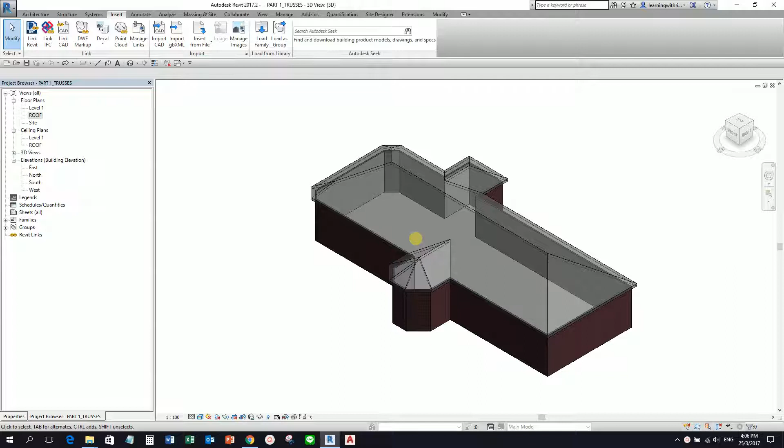So what I'm going to do is change my view first to roof. Then from the structure tab, from the structure panel, you can see the tool there, truss. So I'm going to select the truss here.

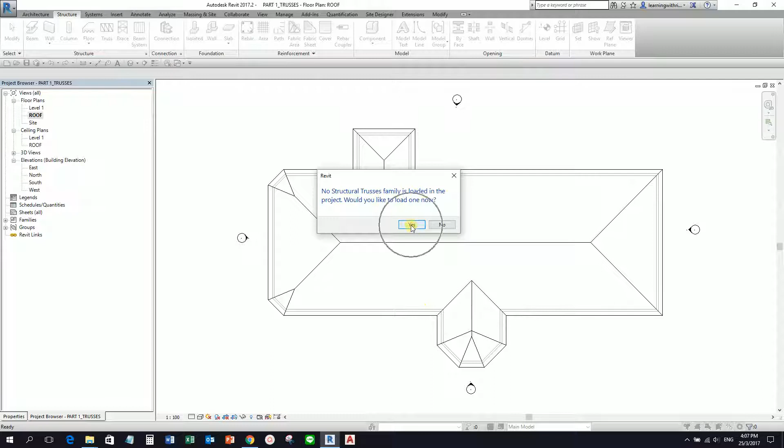You will notice in this data set, in this exercise file from lynda.com, the trusses are not yet loaded, so we're going to load one now. I'm going to select yes here, then go look for structural trusses, and select here Howe flat truss. I'll just select this one, then select open. There you go, so it's now loaded.

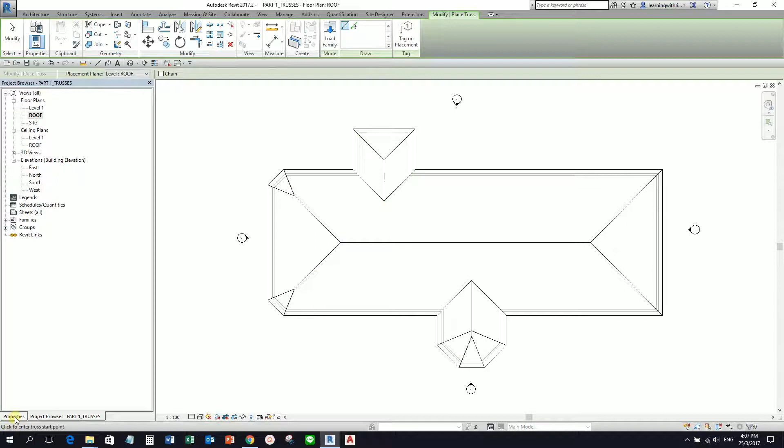So before I place this one, I'm going to change the bearing vertical justification. Instead of center, I'm going to change this to bottom.

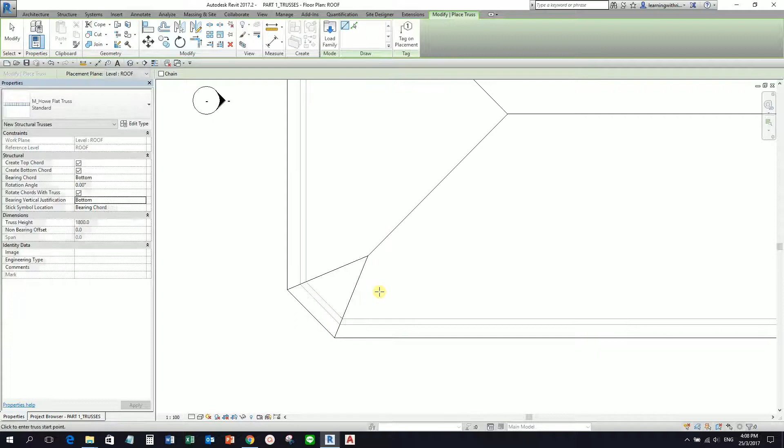So let's now go ahead and start to create our truss. I'm going to place one here, one, then I'm going to place one here, two. Let me just change my visual style to wireframe so we can see the truss. Alright, so this is our first truss.

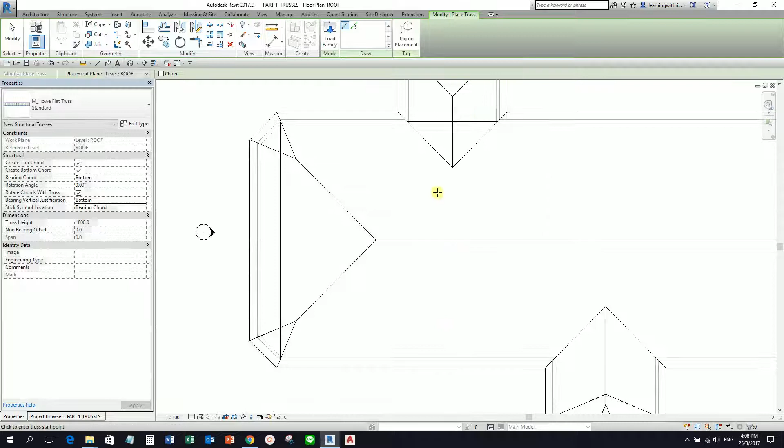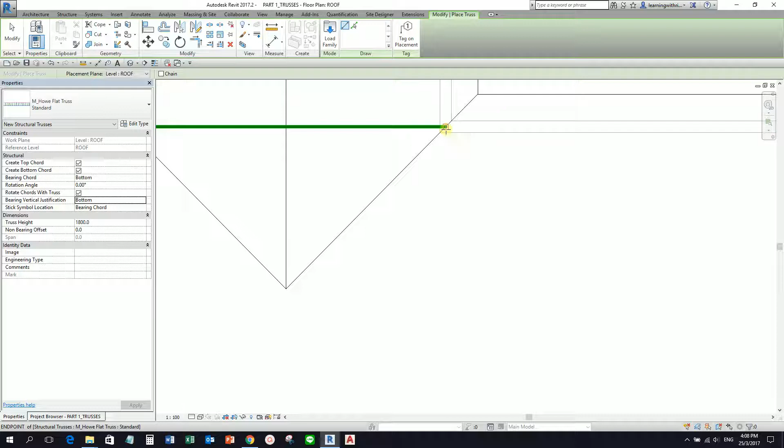So let's say I'm going to create one here also. I click here, one, then I click here, two. And then I'm going to create another one here. One, then I'm going to click here. So I'm going to place another one here. I'm going to place another one here.

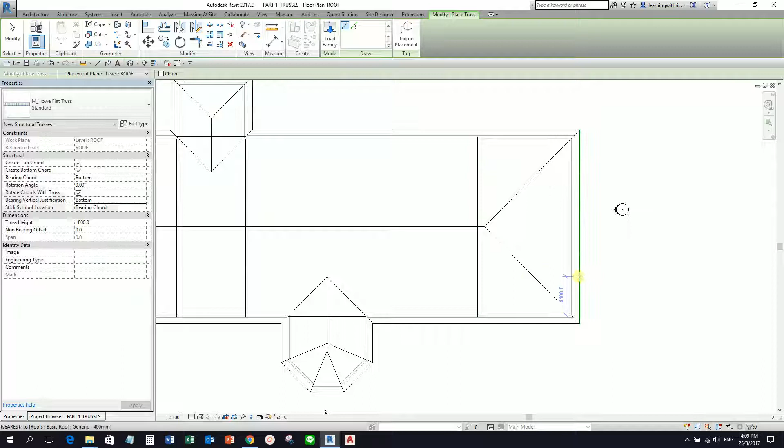The exact location is not critical in this exercise. Later on, we're going to modify the dimension. Then I'm going to place another one here also, and create another one here. 2000. Okay, here also 2000.

So what I'm going to do next is copy this, 3 more copies. So I'm going to select copy, make sure the multiple and constraint is checked. So I'm going to pick the base point, 3 more copies, 1, 2, 3.

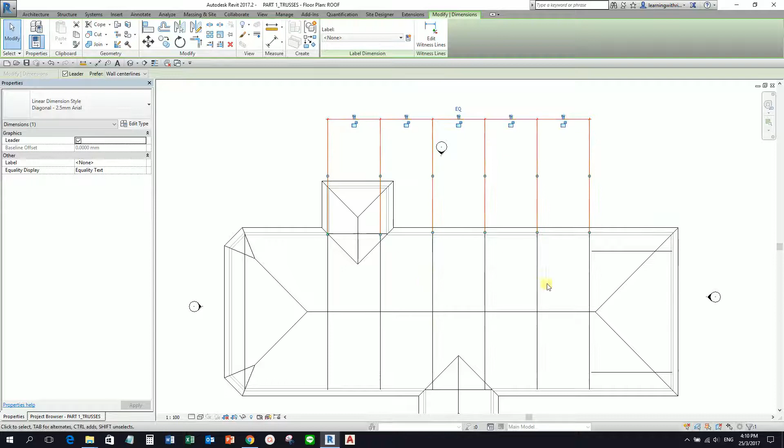Now, to make these trusses equal distance to each other, from my quick access toolbar, I'm going to select aligned dimension, then click this one, 1 through 6, then click outside, and select EQ. So it will make these trusses equal to each other. Then I select modify. But I do not need this dimension, so I'm just going to delete this. I just use this to equalize the distances, but I don't need this one, so I'm going to delete it and just select unconstrained.

So same with this truss here. I'm going to select this and then copy 2 more, 1, 2, and then modify.

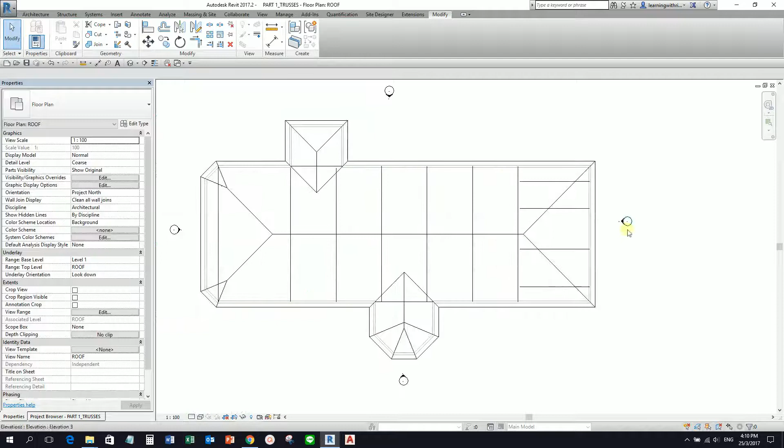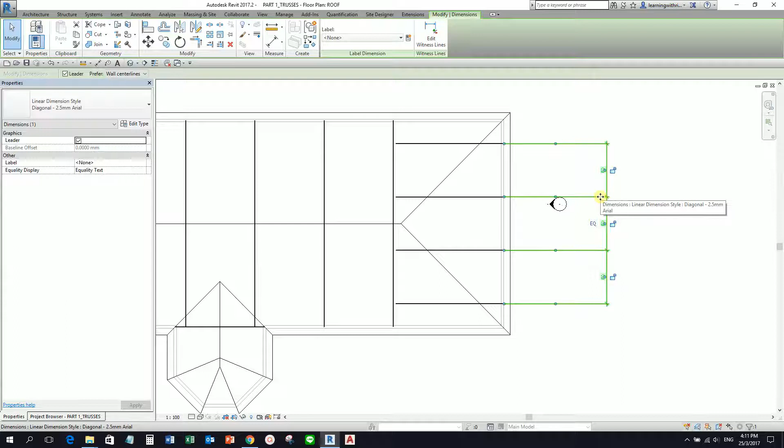Again, we're going to make their distances to each other equal. I'm going to select aligned dimension, pick here, and select EQ. There you go, so it's now equal. So what I'm going to do next is select this dimension and delete it, again just unconstrained.

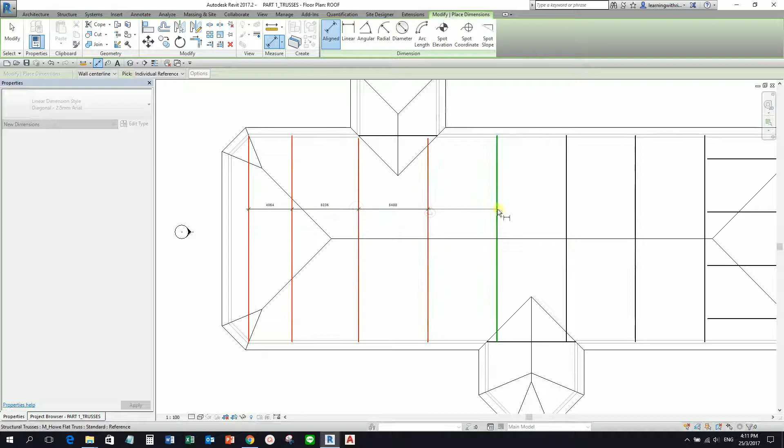Okay, so probably I'm just going to add another truss here. I select this, right click, create similar from here to here. Probably I'll just make them equal distance to each other. Pick EQ, and join. I think it's not a good idea, so I'll just undo.

Alright, so no need for me to make it equal. Anyway, I can just select that and then use the arrow on my keyboard to move it.

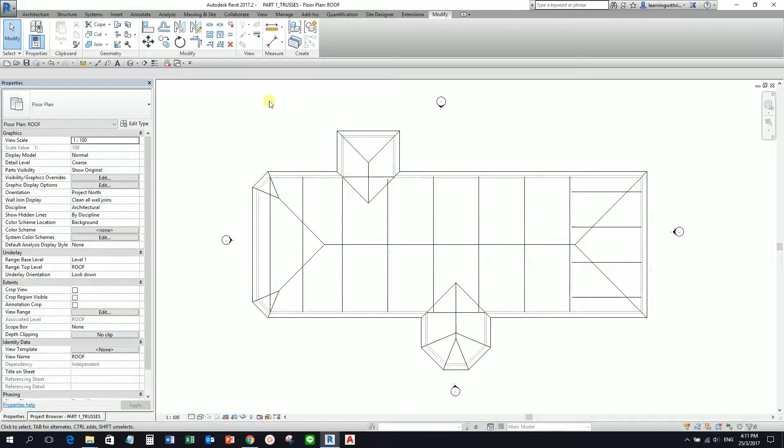The next thing that I'm going to do, if you change your view to 3D, you will notice it's like this, right? Our trusses are sticking out from the roof. So that is the next thing we are going to modify. We are going to attach our trusses to the roof.

Okay, if you still remember when you create your wall, there is this tool called attach top base. You see how if I select the wall, there's an option here, attach top base. Actually, in your trusses, you also have that tool.

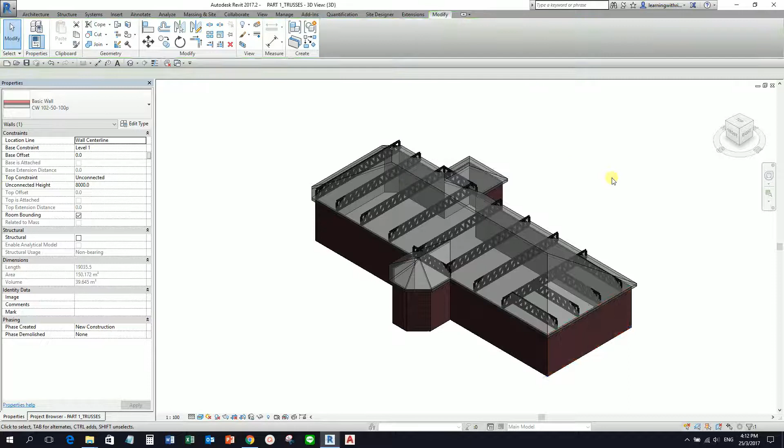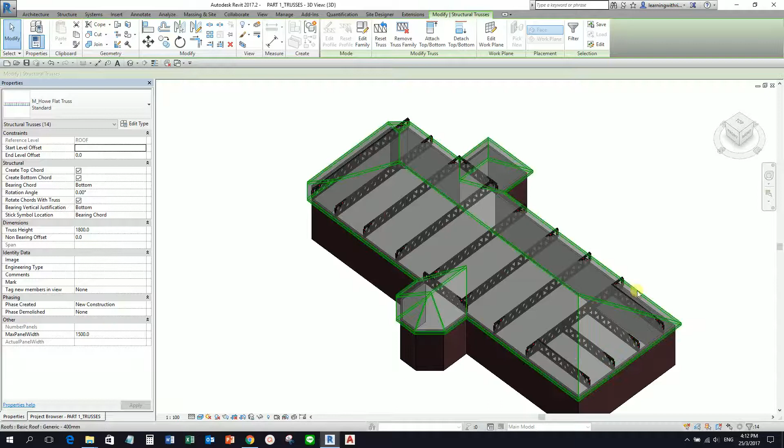So let us go ahead and select all the trusses. I'm going to select one truss, right click, select all instances visible in view. So it now selects all 14 trusses that we created. All the trusses are selected now.

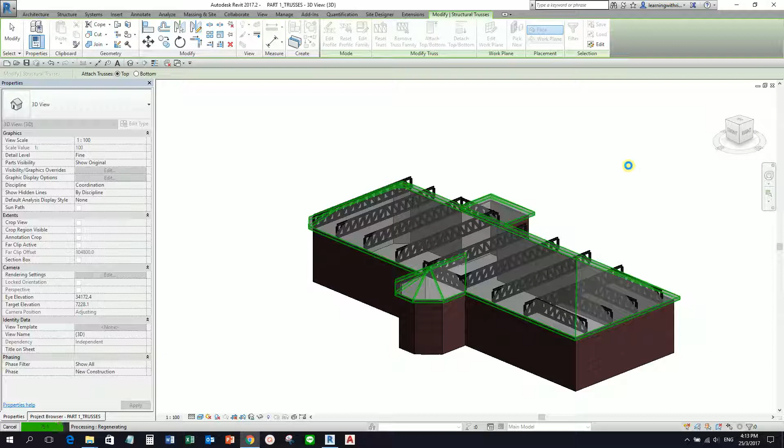The next thing we are going to do is select attach top bottom. It will take a while, just need to select the roof, and it will load. Let us just wait. So laying on trusses is pretty simple, right? You just need to draw your trusses using the line tool, or you can also use the pick lines tool to create your trusses.

There you go, so our trusses are now attached to our roof.

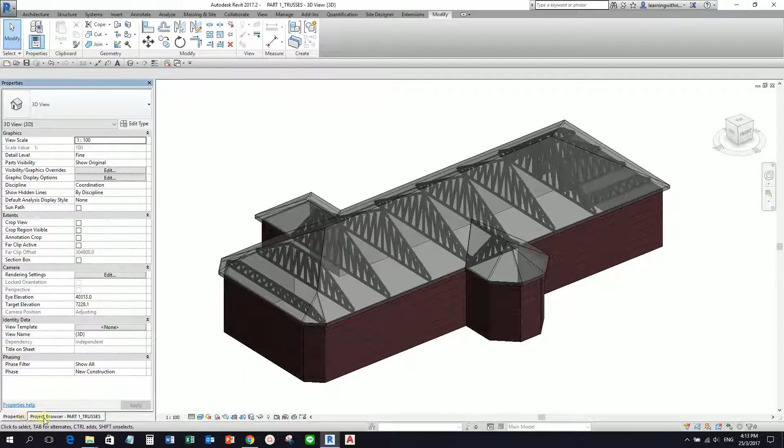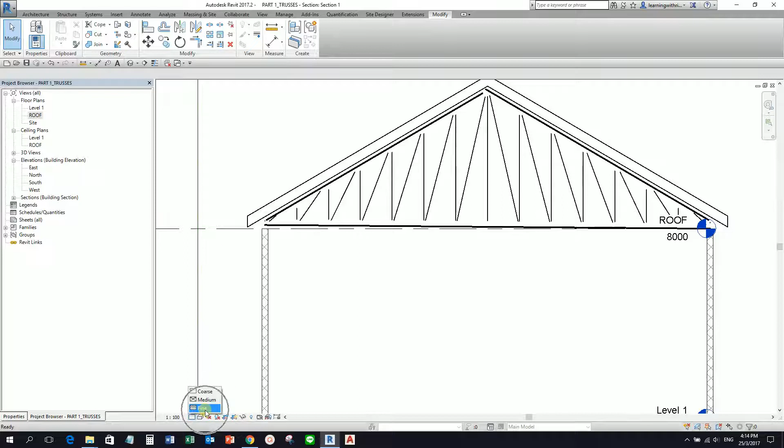So hopefully this video has been helpful to you. So if I'm going to create a section, let me just create here. So this is how it looks like in the section view. Now our trusses here show in single line. You can just change our detail level here to fine. You can also type SD for shaded view. There you go, so this is how it looks like.

So in our next exercise, we are going to modify these trusses that we created. Okay, so hopefully you learned something from this video.